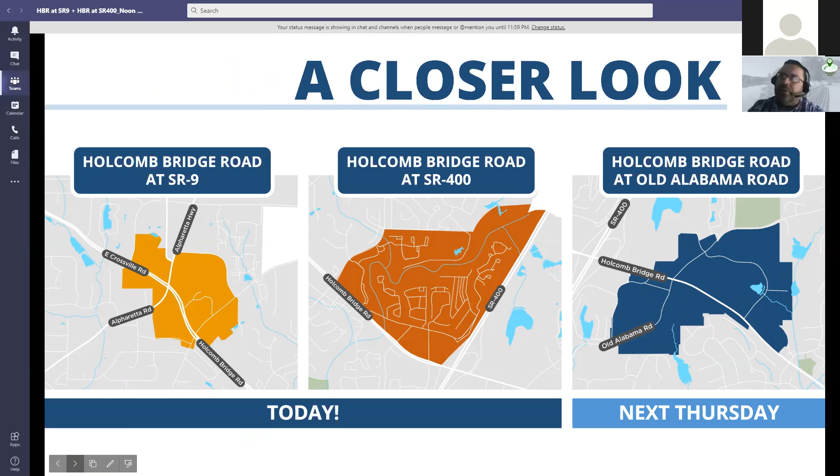So as part of that, we are taking some deeper dives into specific areas. Today we're looking at these 2 nodes, but next Thursday, we'll also be looking at the area just east of 400 around Old Alabama Road. So if you're interested in that and you haven't signed up yet, we absolutely encourage you to do so.

All right, so let's talk a little bit about the context of this. At all 3 of these locations, we're really talking about redevelopment. These are sites and locations that already have a lot of development. So if we're thinking about what they may be in the future, it's inherent that we're talking about redevelopment.

And redevelopment is not as easy as one might presume. I'm sure everyone has passed by that vacant shopping center and can't really quite understand why. Why can't they just turn that into something nicer? Well, it's because it's more complicated than just throwing some money at it.

To the degree there are existing leases and tenants in place, that really makes change difficult. If a property owner is considering redevelopment, there's no revenue during that period, no revenue from rent. It requires a lot of capital and debt to go ahead and redevelop, and a lot of complicated financing also. And fundamentally, it's taking on risk.

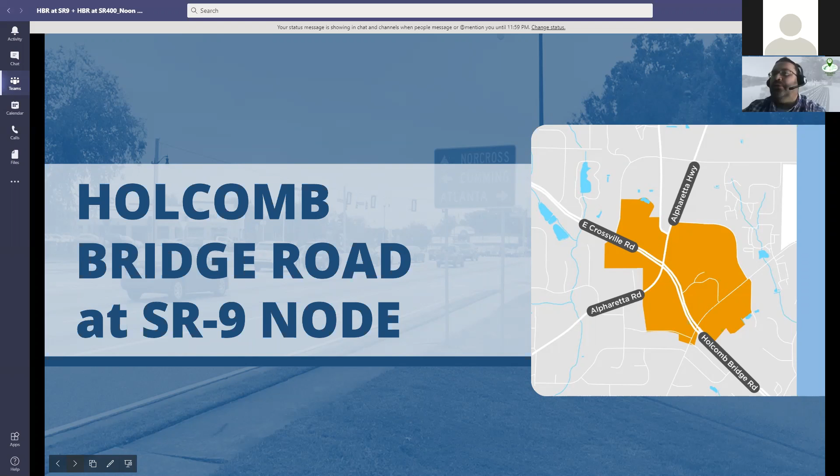If you have a phone or another device handy, that's probably the easiest way to do this, but you can certainly do this at a desktop as well. So I'll give everyone a moment to sign on, because we'll be going through a series of questions through this application. Again, it's www.pigeonhole.at, and the passcode is plan 2040. We'll just stop here for a moment to give everyone the opportunity to sign up.

All right, let's move forward. Is anyone having any trouble signing up? Okay, well let's move forward then.

All right, so let's talk first about mobility, focusing again on 9 and Holcomb Bridge Road. There's a few things going on from a mobility standpoint in the existing conditions. Obviously, this node is defined by two very large highways, Holcomb Bridge Road and State Road 9. They're both state routes, both state maintained, so the city has influence to a certain degree, but it's not necessarily in a position to make decisions about what happens specifically on those two roadways.

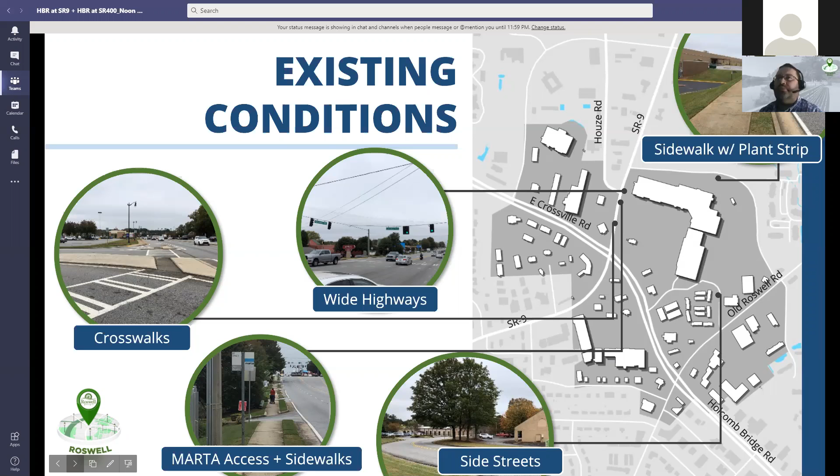So we have wide highways. We do have pretty good pedestrian coverage, some good sidewalk coverage and crosswalks. MARTA comes through here with a couple of routes, and we also have a lot of interesting side streets. We have Commerce Parkway, Old Roswell Road, and Houze Road coming in. So there's lots of little things going on from a transportation standpoint right here at this node.

One thing we want to be cognizant of is other plans and thoughts the city has had for the community and this area specifically. Last year, the city prepared a bicycle and pedestrian master plan, with some ideas for sidewalk coverage and a multi-use path, as you can see here on this map. Also, a few years ago, there was a larger comprehensive transportation plan for the entire North Fulton area, which relates to the Atlanta Regional Commission, which provides a lot of funding for projects. Those two dashed black lines are two projects that come out of that effort.

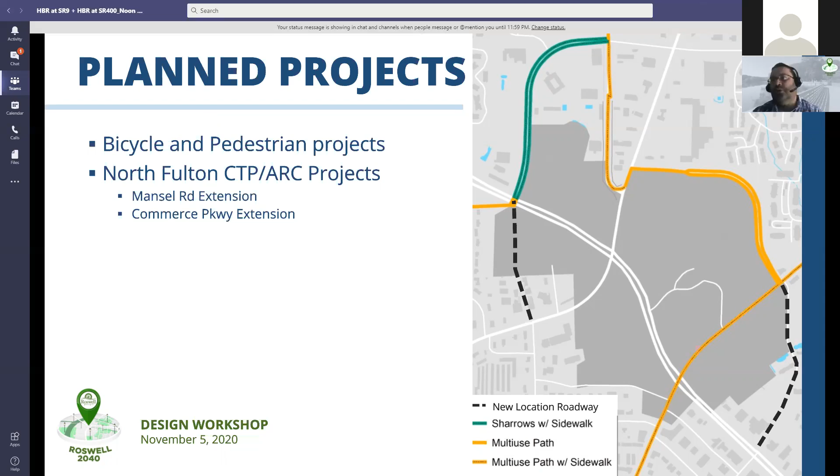An extension of Mansel Road, where it would come all the way down and loop back into State Route 9. And then also an extension of Commerce Parkway, where it would extend past Old Roswell Road and into Holcomb Bridge Road.

And we always want to think about safety also when we're looking at things like this, and in particular, pedestrian safety. There's high sidewalk coverage, like I said earlier, but some of it is disconnected. We're fortunate that we don't see a tremendous amount of crashes involving pedestrians here, and that's not quite the case at some of the other locations we'll be looking at. And then, like I mentioned, there's also transit connections with MARTA bus routes 85 and 185.

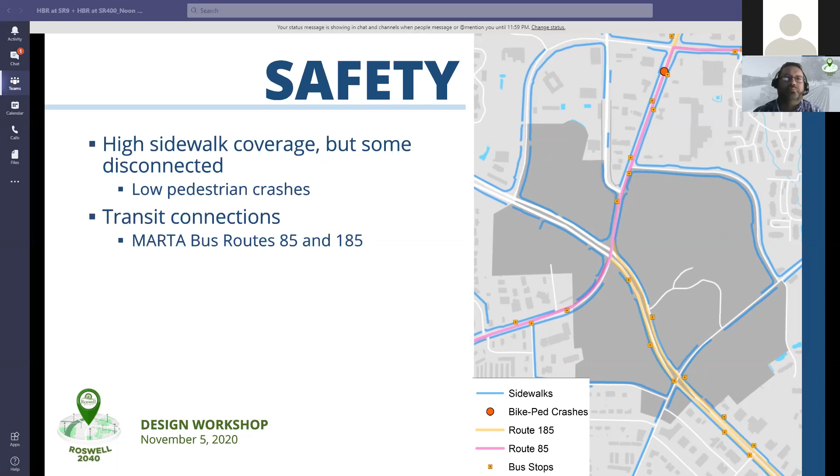So the main character area at this node is the Highway 9 Alpharetta Highway character area, and it calls for mixed-use, pedestrian-friendly corridor and activity center with the flexibility of new and enhanced uses for some of the existing big box development, and looking at adaptive mixed use and commercial infill. This is from the previous comprehensive plan, and it sets a vision for what the community wants to see in the future.

In terms of zoning, that is what controls the current uses. For the most part, this area's zoning is commercial mixed use to reflect what the community would like to see in the future. We've got a little bit of office park and some civic and institutional use, but for the most part, this is zoned for commercial mixed use type development.

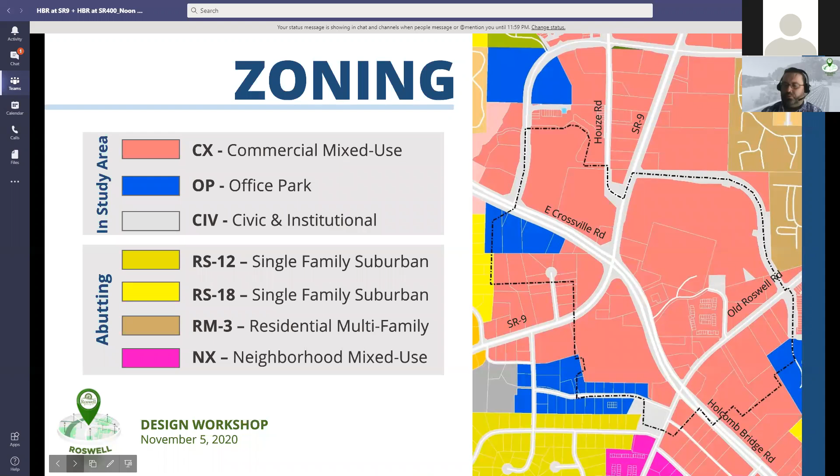For the existing conditions, you've got a large shopping center here with the old Cineplex, the theater. You've got some office parks mixed in, a lot of out-parcel commercial, and some retail here with the Kroger, and then you've got the strip commercial. So there's a lot, mainly commercial uses here now.

You've also got some more office parks, big box commercial, some fast food, and then there's an updated shopping center where the Marshalls is. And then you've got this very large vacant parking lot shown here in panoramic view, and that's a lot of underutilized space that could be put to potentially a better use.

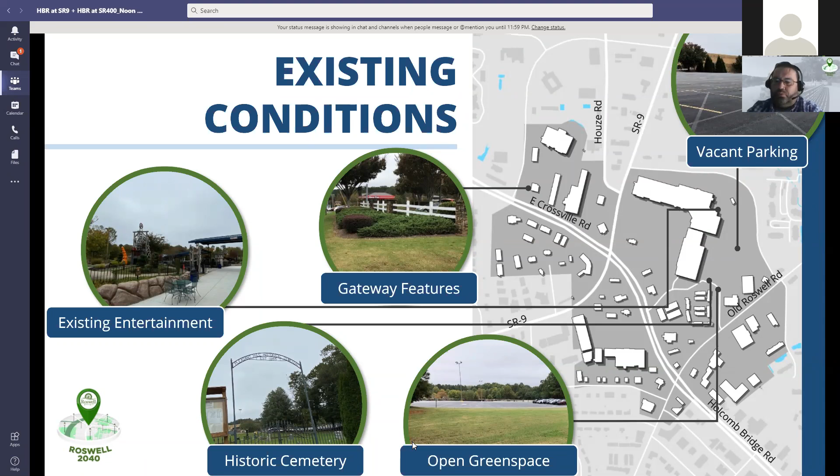So different areas to think about. When we think about, if we go to the next slide, some of the opportunities and constraints — Eric touched on several of these — we have a major intersection node in the middle of the corridor. So that's something we have to acknowledge and recognize.

Two major state routes — how do we work with that and address that? Very wide roadways. So when we're thinking about this character area, our goal is how do we make sure we can better connect both sides of the corridor. You have Houze Road, which has a very unique design.

It kind of drops people in there. But you also have some potential bike-ped connections through the corridor. You have obviously some open space opportunities, and you already have an existing cemetery.

So the idea is really trying to figure out how you better utilize, or how we can encourage better utilizing, existing parking lot areas and building footprints and layouts. Some of the uses are very well used — people like them — but how can we make them work better, so developers can see a higher return on investment, and you can see more retail, more office, more entertainment areas, and more of those opportunities.

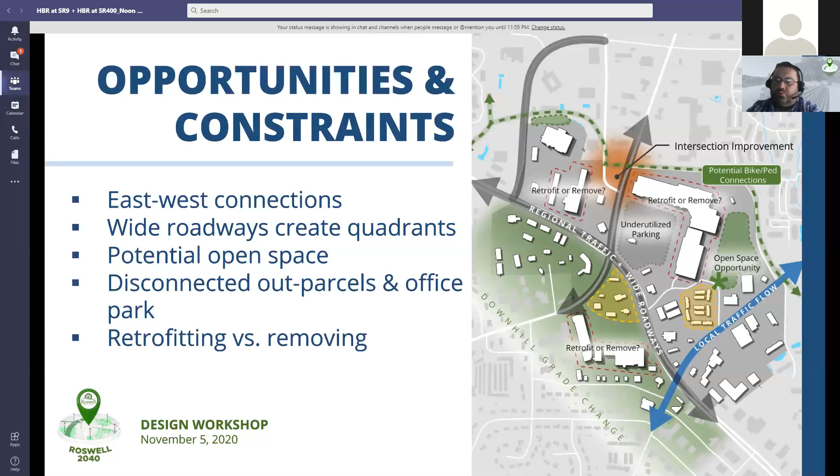So, next slide. We kind of caveat this with two different approaches to addressing this character area in terms of redevelopment. One is retrofit and infill — you work with what you have existing, but you maximize and create better uses of the space, and work with those out-parcels in the areas that are less than desirable, that don't provide good, strong corners and edges along the roadways, and begin filling them in and thinking about different ways to connect.

As you see on the screen here, you've got some things happening to promote that. One big key is thinking about Houze Road and how it connects across the corridor on the backside of the property, as Lauren can show you, following back along the mini golf course and connecting. So connecting that across the corridor, thinking about other interior connections, and maximizing the existing open space on the backside near the mini golf entertainment area.

But again, if you look at this space, what you'll see is you create a better street typology and hierarchy. Right now there's major roads, but not a lot of interconnectivity, so you really begin by defining that and improving mobility. If it's easier to move around, if it makes sense and it's logical, that reduces the number of trips people have to take and drive across the street. That's a big win, it improves traffic operations and cleans up the corridor in general.

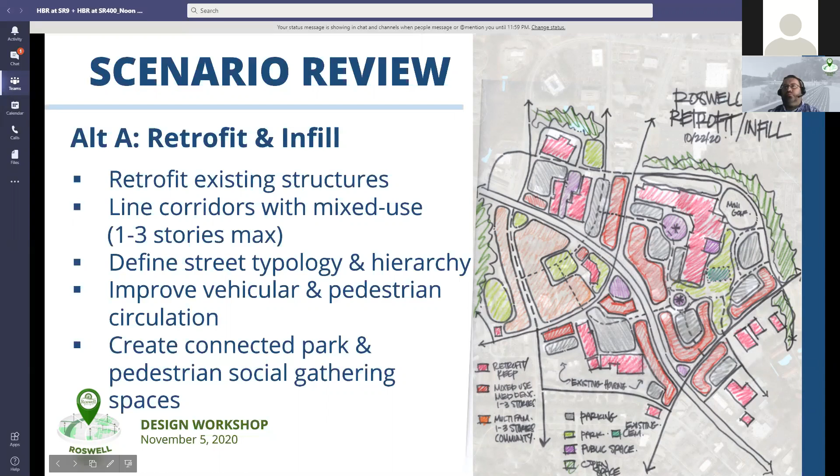Alternate B is a little different. We're really defining this as what does a new town center look like? The first thing I'll tell you is you create a series of nodes along the corridor. There are key intersections that are really placemaking opportunities to create an identity and a character.

Holcomb Bridge and State Road 9, State Road 9 and Houze Road, further east as well. So in all these different areas, you conceptually begin saying we want to define and demarcate this area to make it very clear that this is a unique and special place with an identity.

You then begin building out a framework of logical movement through the space. I always tend to say that the streetscape and that public infrastructure become the groundwork framework for what you're working on, and you build up from there.

Then you begin identifying areas for more intense and mixed uses around the major intersections, because that's where there's more visibility, and you stagger it and step it back as you work towards residential uses and more open space. So it's a natural transition from existing mature residential areas, existing land uses, and other commercial developments that aren't seeing redevelopment. You have to be very sensitive about how you build this out.

That makes a lot of sense. But again, as you consolidate uses and introduce mixed use, it allows people to really rethink their patterns and movement in this area. Next slide.

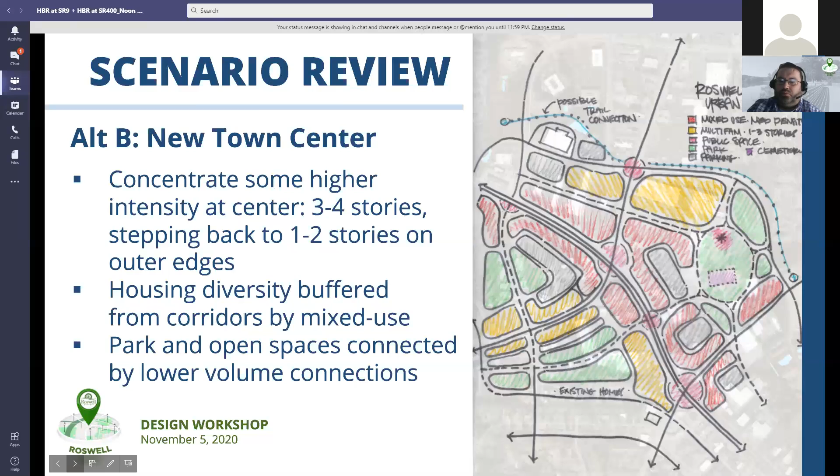So on the screen here, this is another opportunity for you to vote. We're going to ask you 3 different questions. The first one is about development. What does good development look like? What makes sense to you? What are you drawn to?

Looking at these, there are a variety of different options. They're all different sizes and scales of development, but we want you to look at these and see what draws your eye, and vote on what you are drawn to.

You have certain areas that are 3 to 4 stories with ground level retail, like in item 2, 7, or 8. Number 4 is a great example of a townhome development, but in a more urban feel. Item 3 shows the image of the Aldi, which is a lower intensity development, more of a retrofit feel, 1 story but designed in a way that makes sense. Number 9 is the same way, really a retrofit of an existing shopping mall, whereas number 5 and 6 create these village style feels.

So I'll let you continue voting for just a second to see where people land.

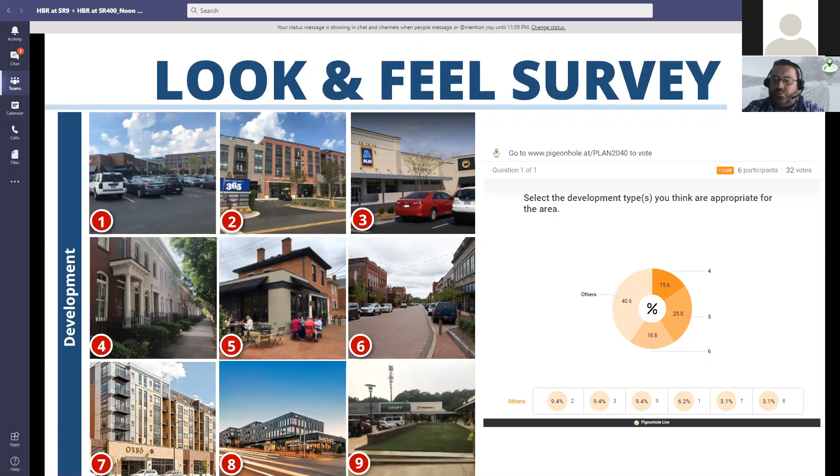But I'd like to go to the next slide too to continue moving it. This is the second question, which is about open space. In this area, when you think of town center or even a retrofit, you're finding places to activate the space, both for the retailers, but also for families, and so people can linger longer. And we know that if people linger longer and spend more time, they'll spend more money, and places are more sustainable. So what jumps out to you that is really attractive?

As you can see, as people vote here, we'll give it a moment. We'll kind of dissect some of the votes here in a second as you guys vote.

And not surprisingly, especially number 6, you know, 5 and 6 are more closely linked to some degree. They are kind of characteristic of these kind of village settings where you have commercial retail, but at a very human scale. We have public gathering spaces, public art. It's family friendly.

You obviously have a lot of others, and number 2 and 3 also indicative of that kind of more town center feel. But you also have to have places for younger children, right? They're less drawn to the breweries than they are to the playgrounds. And so you want to be able to have it for the whole family. It's not just, what we always like to say is, do you create places for an 8 to 80 community? If you're 8 years old or you're 80 years old? And how do you kind of think through that? And that goes to the park spaces as well.

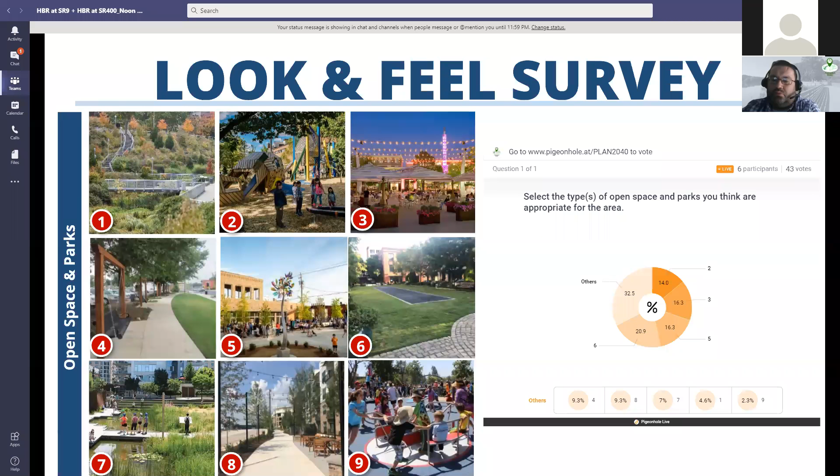This is really helpful and really good information. So thank you. I'm going to go finally to the last questionnaire, which is streetscape. So we know streetscapes are our biggest public investment, right? We always want to design them and think about them well. And so streetscapes have direct linkages to economic success and placemaking.

Do you have places where you can sit outside? That's number one. Number two as well, do you have a roadway network that directly links, as number three, trees, parking, streetscapes so it's seamless? Even areas that have curbless streets, shared streets that treat stormwater management differently, like number 3 or number 5 or even number 6.

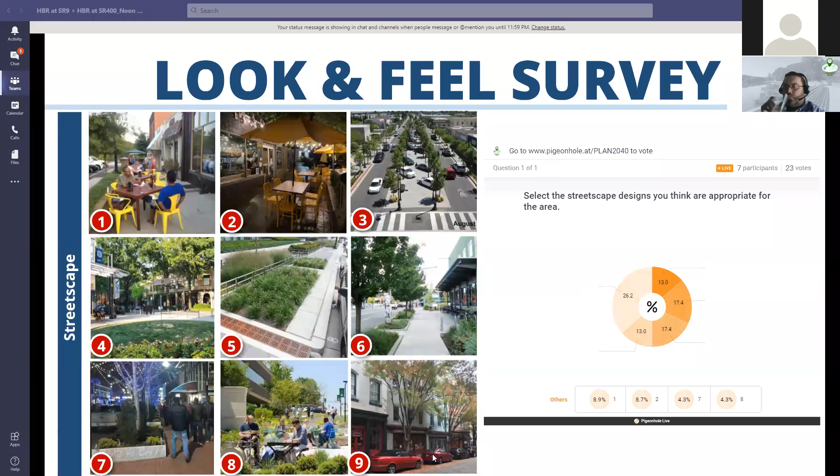Areas like number 7, very urban areas. I say urban areas are areas that have a lot of people in them, wider sidewalks, tree grates, good vegetation, or even number 9, where you have maybe smaller sidewalks, but you feel very integrated, like the sidewalk and the street, that they blend together. So there's a lot of different feels here, and so you want to get your feel on that and your take on that.

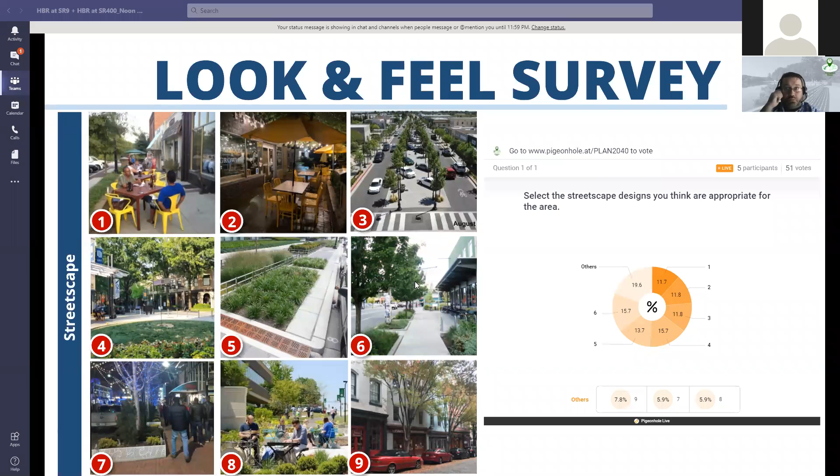Well, as you can see, number 4, and they're all very evenly spaced, let's be honest. But number 4 is a little bit higher than others, and you can kind of see it's more. And number 6, I mean, number 4 especially is indicative of that kind of village feel that you all talked about earlier and voted on. And number 6 has a really good- I love number 6. It's got a great spacing to it, right?

It's a very clear delineation of where the pedestrians live and work. You've got sufficient room outside of restaurants to have eating and dining. You have sufficient places for your bicycles. You have meaningful street trees. And so often we see that that's a failure, where we put street trees in and they die because they don't have adequate room to grow. But these are meaningful places to plant trees and help them do the function of making it a more pleasant space and address stormwater concerns and limit stress on infrastructure. So they have multiple purposes here.

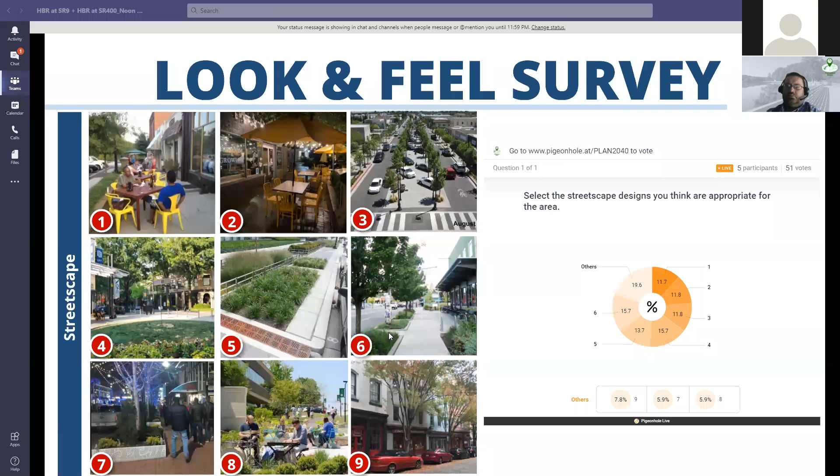So this is really very helpful. So thank you. So with that, I'm going to, I think the next slide is back to you, Eric, as we think about that.

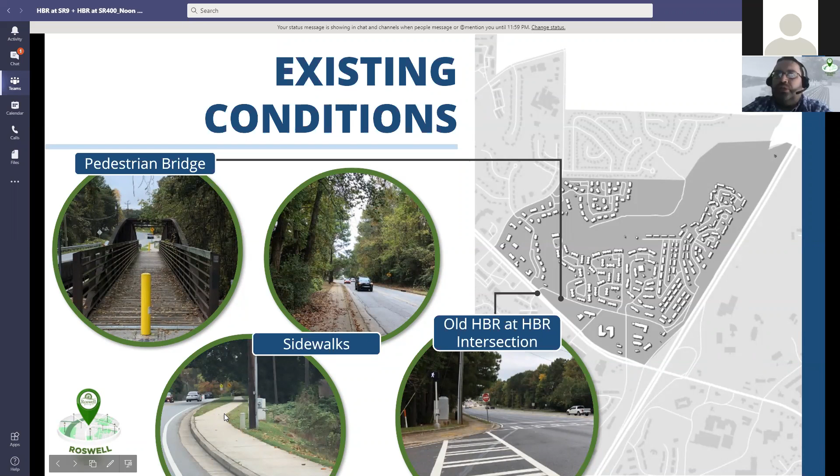Next slide. So for existing conditions, there are some pedestrian connections right on Holcomb Bridge Road and Old Holcomb Bridge Road. As you get back into some of these complexes and neighborhoods, you don't see that connectivity as strongly. There are some pedestrian-involved crashes along this stretch, which is unfortunate and speaks to the issues just mentioned—it's really not an environment conducive to walking, even though lots of people are doing it.

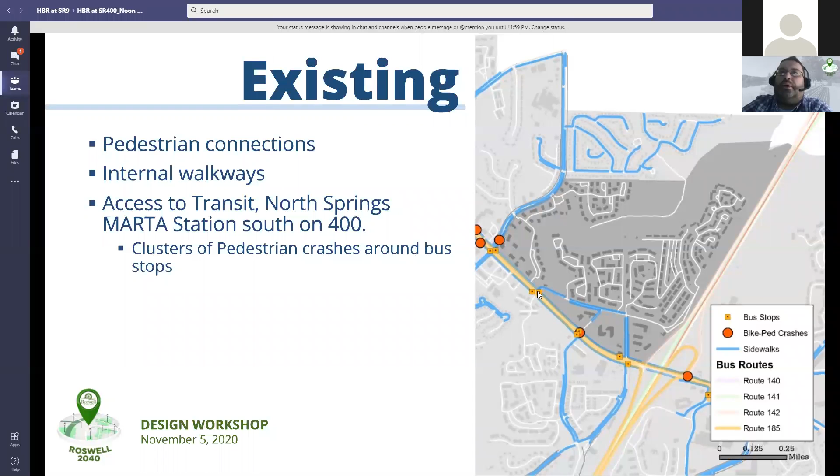Some of that, we're really noticing at the bus stops along Holcomb Bridge Road, and the access to transit.

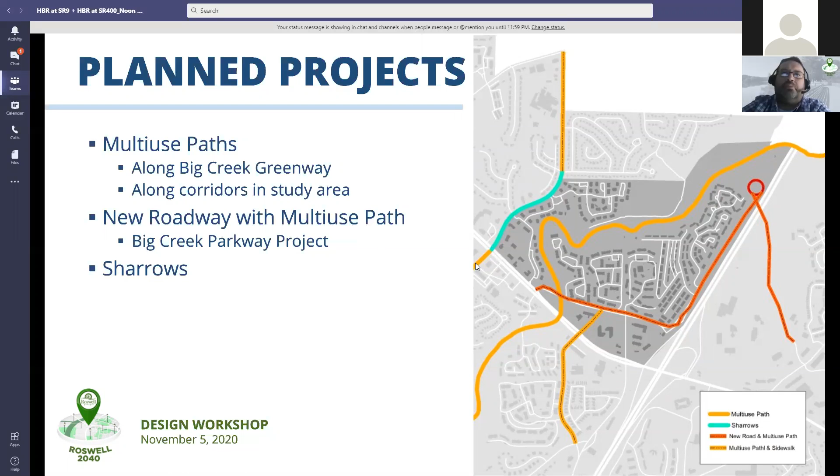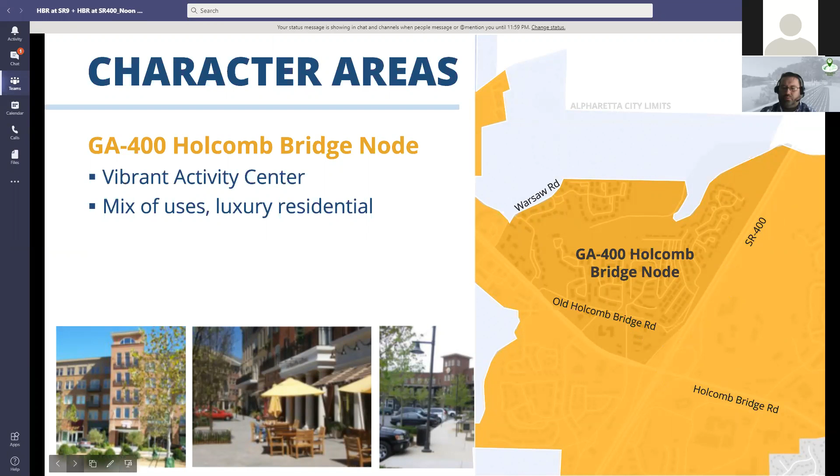So the Georgia 400, Holcomb Bridge node calls for a vibrant activity center. You're right here at this major intersection with a large state route, heavily traveled, and then you've also got Holcomb Bridge Road, allowing for a mix of uses and making this a place for people to come and enjoy at this large and very active node.

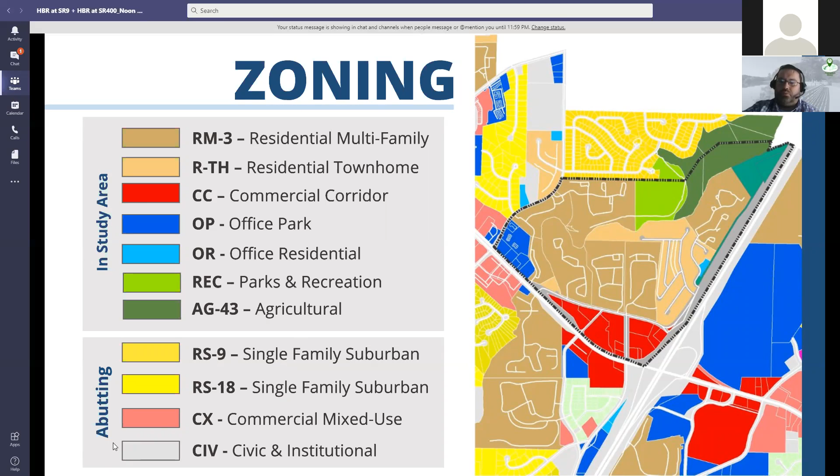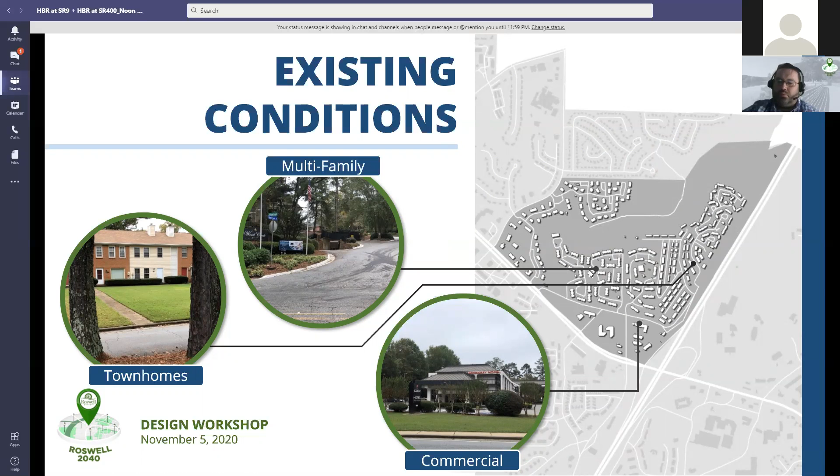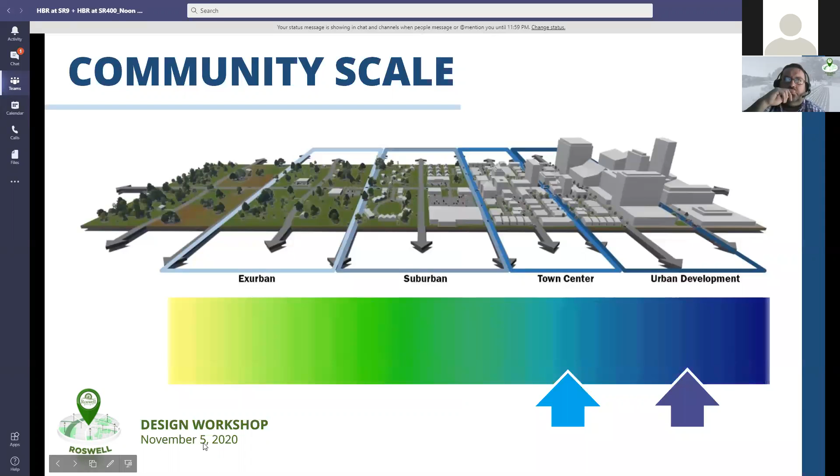In terms of community scale, when we asked on social pinpoint, you had town center and urban development at the higher intensity level. In that input, we did hear a desire to see a mix of town center and urban development in this area, probably focusing more around the intersection of 400 and Holcomb Bridge Road, while preserving the area to the back, to the north.

So, next question. Do you agree with the broader community input — sorry, hold on, next question. Do you agree that the town center and urban development scale are appropriate for this area? I'm trying to find it.

Okay, this is the community scale poll, and we apologize that for some reason the live voting isn't displaying on the screen as we intended. But everyone can see the voting on the Pigeonhole app itself.

So we have 20% who strongly agree with that, 70% who agree, and then a small percentage, 10%, who disagree. So maybe we can talk about that a little bit in the Q&A session. But thanks everybody for participating.

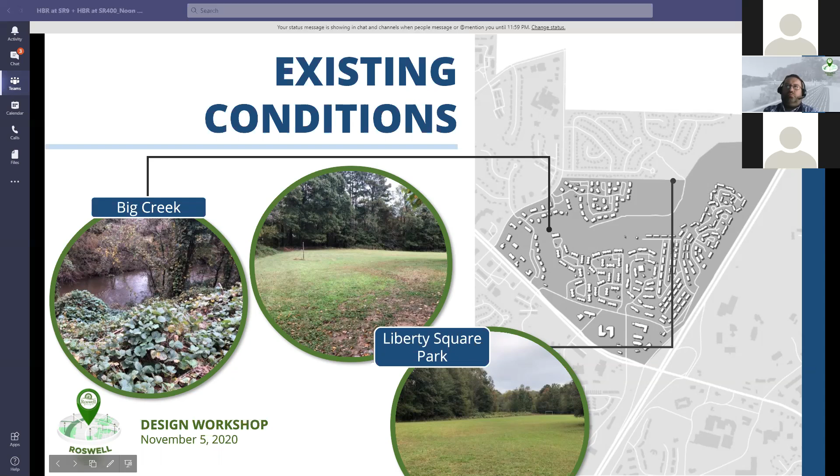If you go to the next slide, let's be honest, we have a major wall on the eastern side that really defines the boundary. It's a strong wall, and you have this Big Creek Greenway that is also a major feature cutting through the northern part of the property. There is, as many of you are aware, a planned parkway with bicycle and pedestrian amenities that will cross 400 and make that connection.

That's going to create a shift in mobility options here, and will help define, as I've talked about before, the footprint for the new development, but also the idea of future Big Creek Greenway connections and taking advantage of that. I think, frankly, when people come off the interstate, there's a lost opportunity right now to make this a gateway. This is a strong connection.

And Elizabeth in the chat mentioned Avalon. Well, Avalon has the same thing - it has a very strong visual presence along 400, so people know it. So I think it's good to keep that in mind. Let's go to the next slide.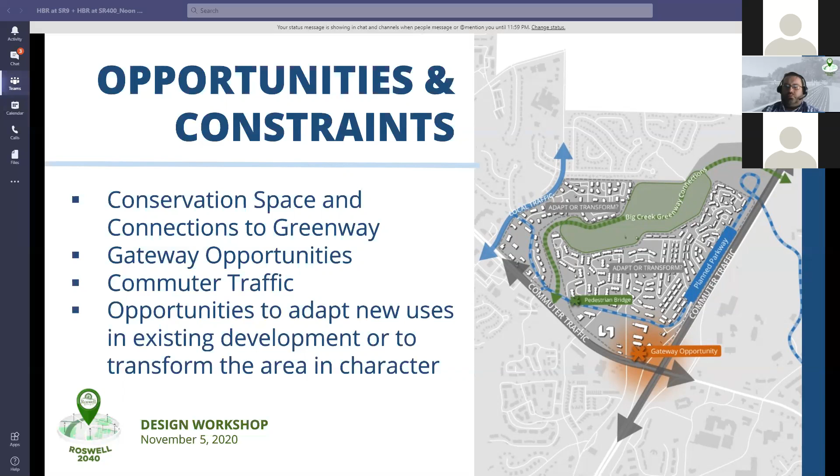Again, we took a couple different options here. One is to retrofit and infill, with this kind of traditional garden-style apartment complex that fits in and around the areas at the northern end, opposite the Big Creek Greenway. You have a couple different areas, especially along 400, where it's very high topographically and looks down into the Big Creek Greenway area, giving a very strong vantage point.

These could be areas with more single-family residential, in some ways almost like a conservation subdivision, built around taking advantage of the natural components of the land, while also providing really nice, attractive view sheds of the Greenway.

On the opposite side, to the west, there's maybe an opportunity for something a little more intense, more townhome-style, built around a central open space. This area on the other side of Big Creek can also take advantage of looking into that area - these are largely residential uses built around open spaces.

And as you come along the western side of the character area, you have more commercial residential, but also maybe more office space along here, framing that corner as we've talked about before - a strong edge, continuing down with mixed use.

And then taking the gateway opportunity, with the mixed use, really along that corridor and right at the intersection. Behind that, the interior space is defined by central open space and green spaces, with medium-use residential townhomes that have direct access across the other side of the parkway to mixed use and retail. So it's a blend of different things.

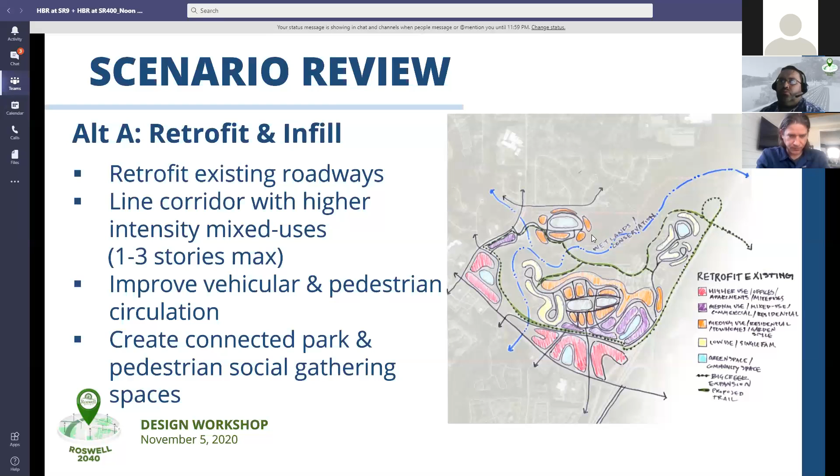But if you go to the next slide, we've given you a different alternative on this one, where we've flipped everything a little bit more. At the bottom of the screen, you're still going to see the parkway become a central roadway through more of a gridded out town center type development.

You have a strong retail use at the intersection. You have a blend of commercial residential and stacks down to more townhome residential, maybe a very walkable village style like we talked about in the previous area. That kind of area, but it's really all linked with central open space that runs north and south. So even though you might have a different use, a different commercial area, they're all linked.

To your west, you still maintain more residential office space, but even if they're in the office to the west, you can walk down and actually have access to retail goods and services. You can really truly make it live, work, play. So you're making sure you're attracting those types of opportunities.

And then again, the same idea we talked about before, a little different format. You're taking advantage of the topography, especially up above where Lauren has the cursor, looking down on the Greenway. And in some sense, what you're doing is making the front door the Greenway versus focusing so much on the 400 interchange.

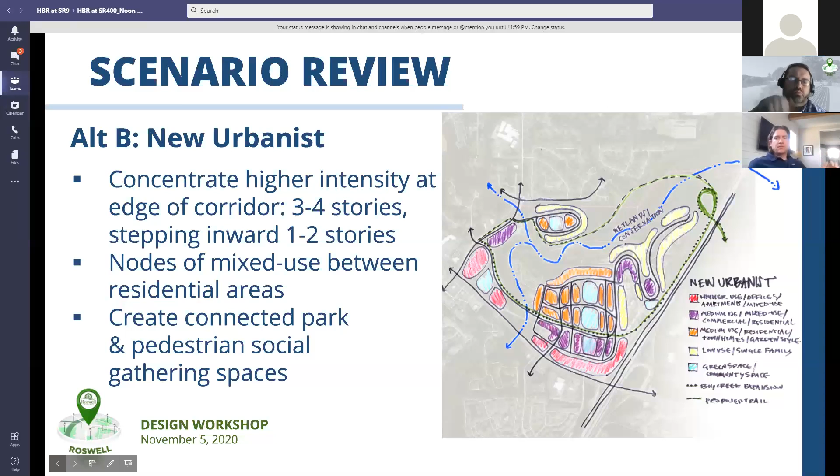So we have the same challenge with this one, knowing the development patterns we're looking at. I'll describe them briefly as you vote. I'm sorry it's not working. You have some of them similar to what we saw before.

5 is an interesting concept, really introducing smaller loft style studio living, higher end residential, but for someone maybe who is single but wants to run a gallery below or have a coffee shop, but still very connected to the neighbors as part of the larger development.

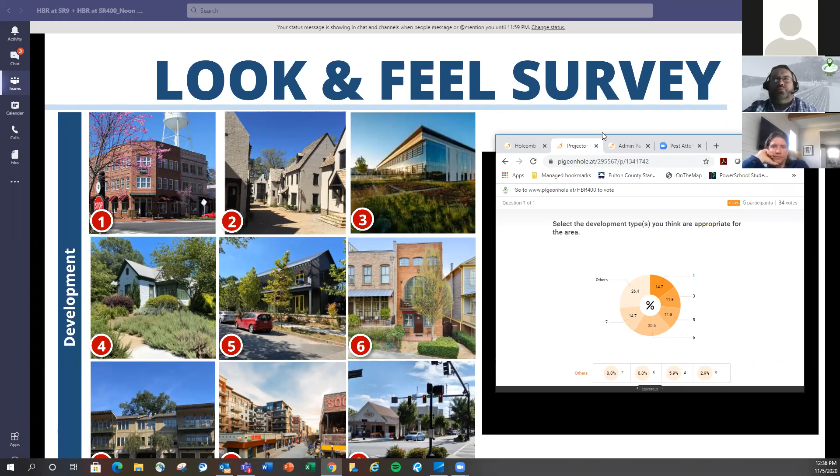So Lauren, if we can go to the second question, open space and parks.

Lauren's going to bring out, now these are very different, because last time we didn't have a stream in the last one. Now we've got the Big Creek Greenway, we've got wetland areas, we have direct access to nature, which is a really strong selling point for people who want to live here. But we also have opportunities for open space and for linear, like in number 9, I'd say it's kind of a linear park feel that is very drawn to people. Still places for all ages. You still want to have that like number 6, or if you want to have a beer in the courtyard by a fire pit as 5, or you're bringing your relatives to go shopping in number 4. These are all places where you can spend time and hang out.

So number 1, not surprisingly, people are very drawn to number 1. Number 7 is very similar to this kind of meadow concept, open space, conservation. While it might not be very popular, I think one thing we're going to have to do is think creatively of how you activate the green space, the Big Creek Greenway, but also preserve it and preserve its natural amenities, make sure it's healthy stream, healthy corridor.

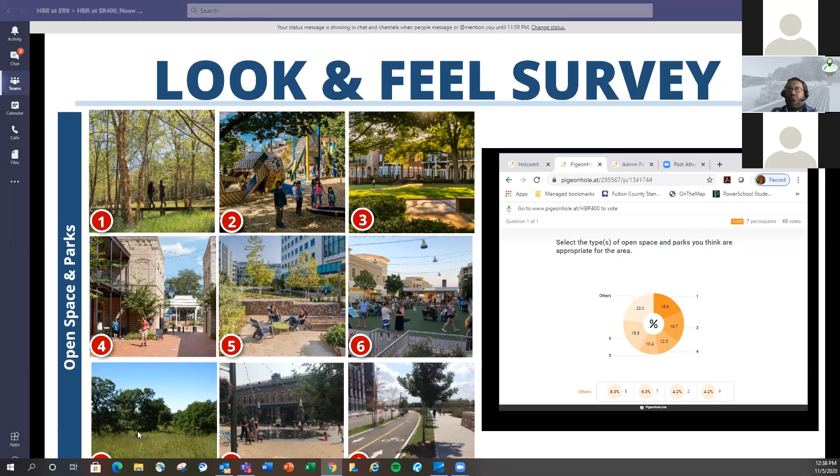Andrew, there were a couple of comments on here about, one was about eco-architecture, and another one about, that one of these options may underutilize the commercial economic development potential of this node. I don't know if any of those would be worth any more discussion.

Yeah, well, let's talk about eco-architecture, right? So I think two things we have going on. We have character areas near each other, right? So as we think about the long-term viability of both of these areas, we've got to think about what is the identity for this corridor, what wants to happen here. We certainly don't want to discount the commercial economic development. So that's really what those walls are for. That's what the mixed use retail and those commercial opportunities are for. That's what is really driving that, strengthening that wall along the major corridor there, and bringing that to the attention. So I want to make sure we're clear about that. So thank you for that comment, and I want to make sure we clarify that.

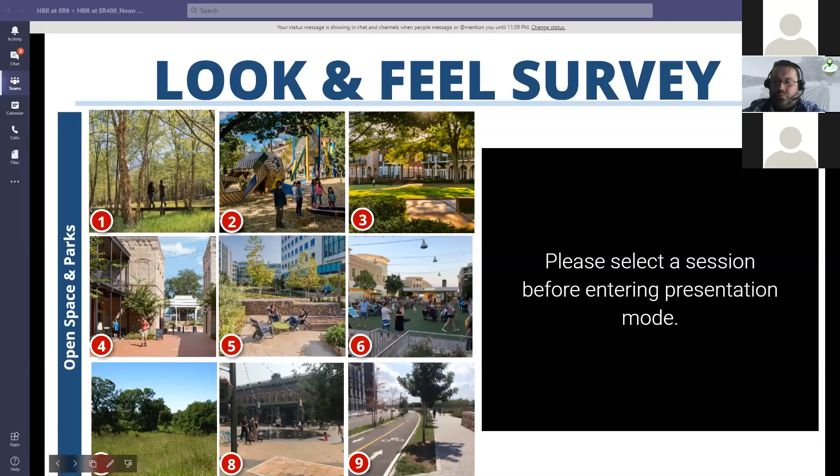But also, eco-architecture, great opportunity. I think it's a way, as you introduce new office space, new residential space, these are ways that can distinguish yourself and draw different residents and users who desire that type of space. Remember, you're right next to the greenway, so that linkage between eco-architecture, ecology, natural systems is very important. So yeah, like number 3 as Lauren has on there. But certainly want to make sure that, for this to be successful, it's got to have a healthy mix of commercial. We want to make sure we take advantage of that because it is a major corridor, a major area. So we can go to the final one now in terms of streetscapes.

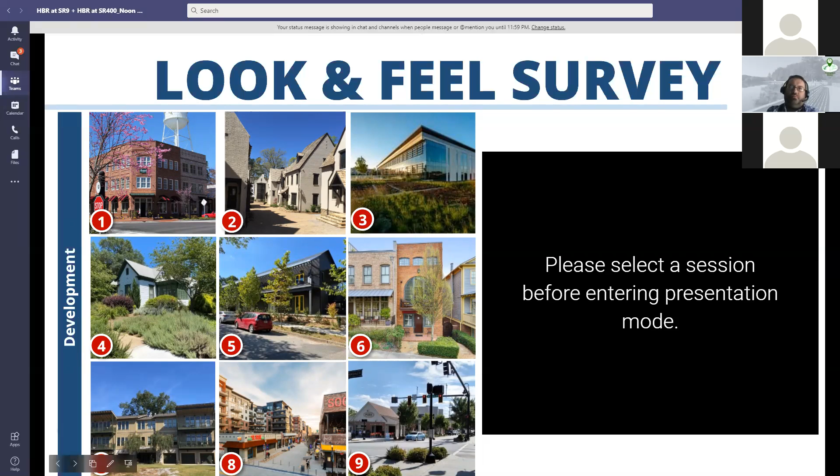And so Lauren's going to bring in the, as we talk about this, again, similar to what we've seen before, try to give you some different ideas and concepts.

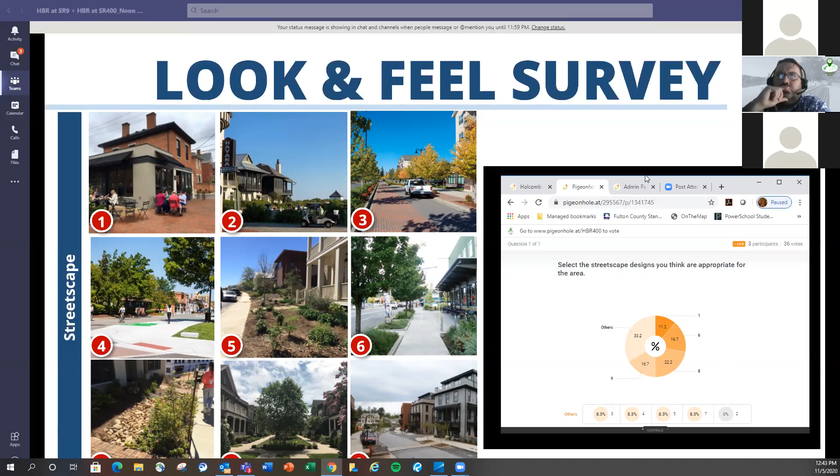What we're going to be doing over the course of today and into the evening, well, first off, in tonight's session we're going to be presenting you some more refined sketches and diagrams and how to prioritize some of these ideas and ultimately come up with a framework and strategy for the plan.

And likewise, as I've mentioned a couple of times, a loop into how this potentially ties into the comprehensive plan as a whole. So over the next afternoon, myself and the rest of our team are going to be working hard on taking all this input we received from you at both these nodes and drafting some ideas. So when we come back this evening, for those of you who will be on that session, you're going to see some of your ideas reflected.

What you'll see will be very much a work in progress. I don't want to suggest it's the final plan, but the idea is that we'll keep pushing the ball forward a little bit, and we'll use this evening to get some additional and more specific feedback from everyone on some of the ideas as we draw them out.